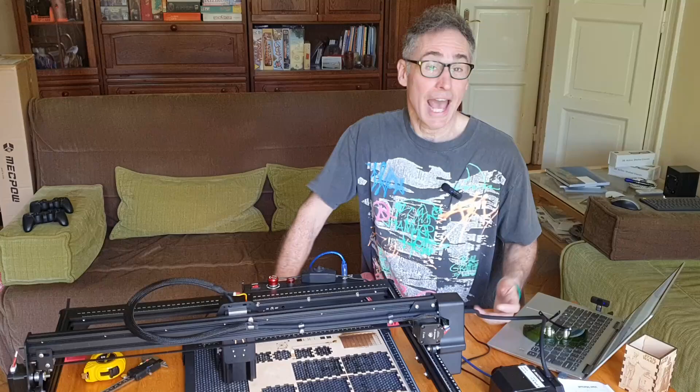Hi everyone! As many of you are still waiting for your Sovol SV08 3D printers to be delivered, I thought we could take a little break from the main theme of my channel and talk a bit about something different, but super exciting for our DIY projects: laser cutting. This Mecpow X5 in particular won't take weeks or months to deliver, as mine arrived basically overnight from geekbuying.com. I have just started exploring the vast possibilities, not so much as an alternative, but more as a complementary technology to 3D printing.

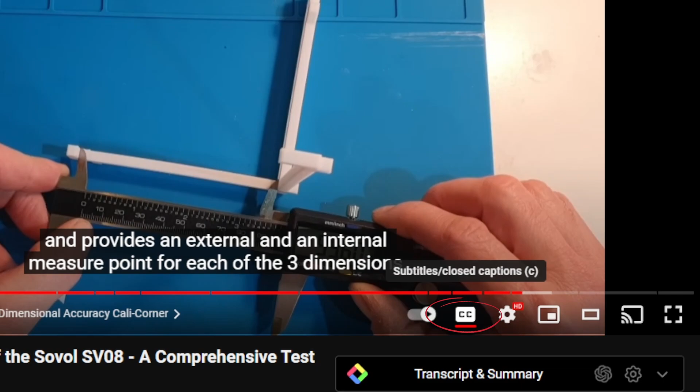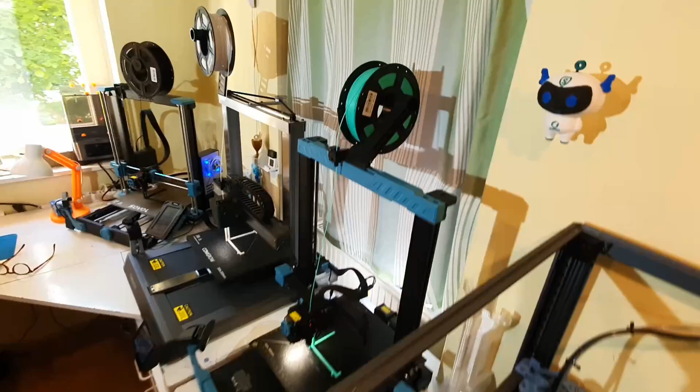You and I, we all enjoy exploring the world of 3D printing, many of us specifically with Sovol's budget-friendly yet feature-rich printers, from the Sovol SV06 Plus to the all-new SV08. But have you thought about looking into laser cutting and engraving? I think laser cutting, much like 3D printing, is another fantastic way to bring our creative ideas to life.

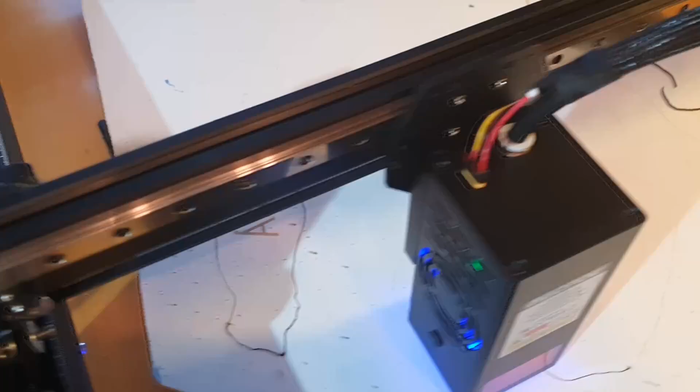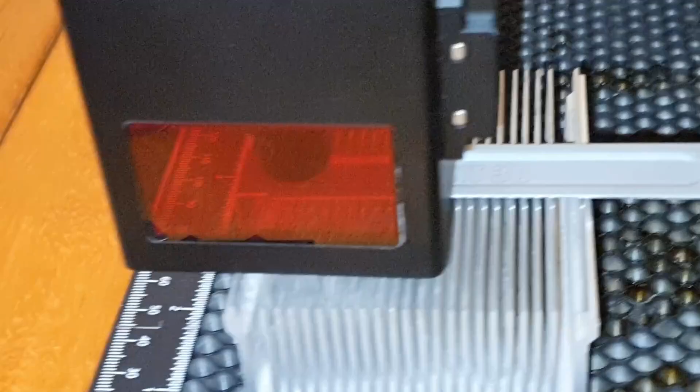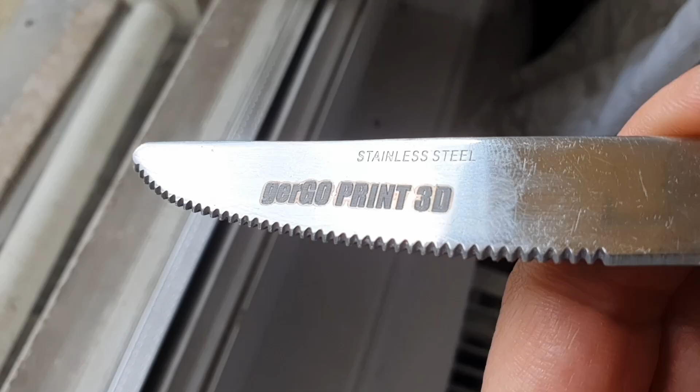Of course, instead of the additive process of printing layer by layer with plastic filament, here we are using a relatively powerful laser to cut or engrave materials like wood, leather, or even some metals. This opens up a whole new realm of possibilities. Imagine making large custom signs, intricate designs on wood, personalized leather items, or engravings on metal objects. All quite different from the colorful plastic we can 3D print. And we can even combine laser cut parts with our 3D printed projects.

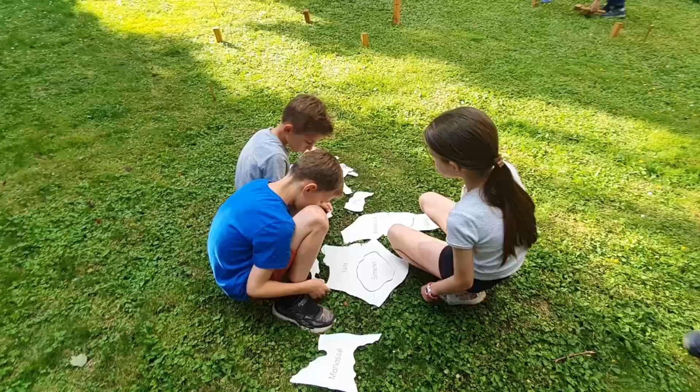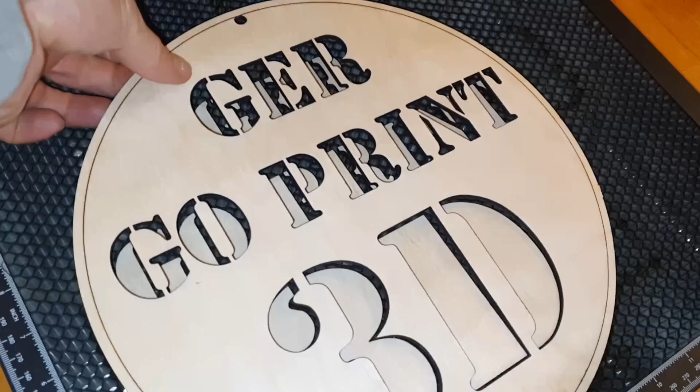What drew me into laser cutting was the ability to work with these more natural materials. There's something incredibly refreshing about crafting a beautiful wooden container or a detailed leather coaster. These materials can be sometimes much stronger and more durable than PLA or even PETG or ASA, not to mention the material cost of larger items, which can be surprisingly low compared to the filament requirements, which is great for anyone on a budget. So, laser engravers and cutters are not a replacement for 3D printing, but a practical alternative in some cases, like creating large signs much quicker than printing.

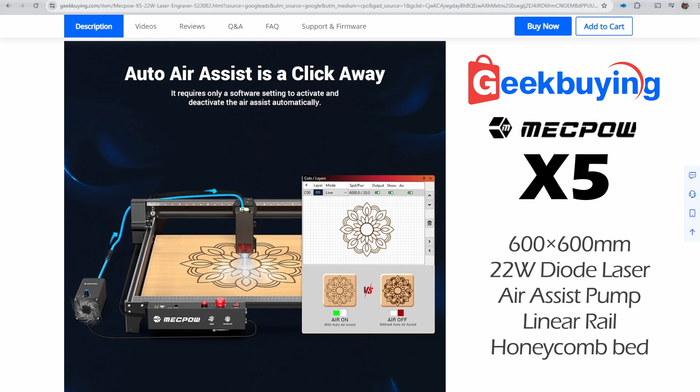Now, just like Sovol has been our go-to for 3D printers, geekbuying.com directed my attention to a similarly impressive option for laser cutters: this Mecpow X5. The X5 offers an exceptionally large 600 by 600 millimeter build area and a rich feature set, all at a fraction of the price of other brands. As I did my preliminary research on which device to get, the Mecpow X5 stood out for its versatility, as it provides most of the features you'd want, and even some more, all in one complete kit just under 500 euros. You'll see in a minute, this includes really everything from a relatively strong 22-watt laser module, an included air assist pump, and the linear rail system, to even the gift honeycomb bed that would otherwise be a separate purchase with other brands.

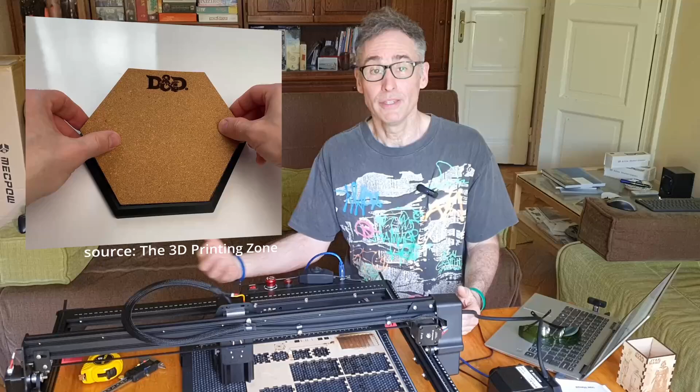I felt the same excitement as last year when I first heard about the value my first SV06 Plus or this latest SV08 offered. I think the Mecpow X5 can really complement our Sovol printers beautifully, for some projects providing alternative materials, for others combining multiple materials, for example 3D printing connections for laser cut wooden parts.

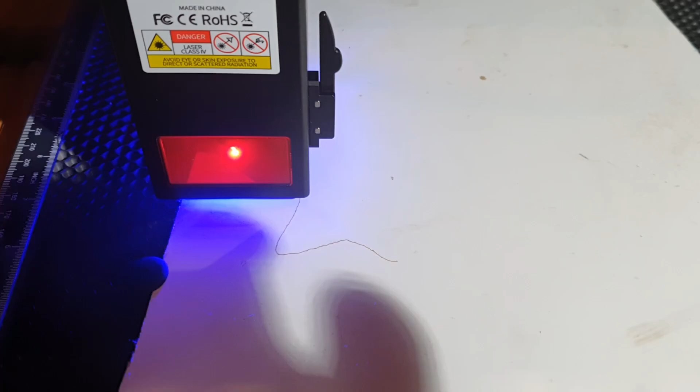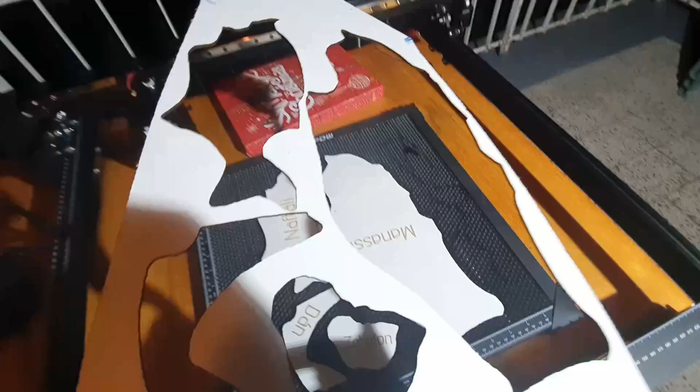Transitioning from 3D printing to laser cutting was smoother than I expected. Both involve working with digital designs and require a very similar mindset. However, laser cutting also brings its own challenges and rewards, making it a great next step for any 3D printing enthusiast looking to expand their skills. When it comes to hardware, this particular laser engraver uses a combination of linear rails and V-slot wheels, kind of like a mixture of the SV07 and the SV08 3D printers.

I hope I managed to pique your interest, as I will show you my initial experience with this large-scale laser engraver, from unboxing to assembly, initial software impressions, and a few exciting test projects, which are of course just the tip of the iceberg. I received 2 packages.

We will unpack this 440 by 440 honeycomb laser pad a bit later. The device comes disassembled in this 95 by 38 by 14 centimeter box that, according to the shipping company, weighed 6.5 kilograms. That's an A4 size sheet of 3mm plywood sample material on the very top of the package. Everything is securely packed in white laser cut foam, how fitting for a laser cutter.

A pretty short 70 centimeter A to B USB cable. The user manual in 6 languages. Safety eyeglasses. Standard EU power cable. And a 24 volt 6 amps power supply with sufficient overcapacity for the 1 amp 22 watt laser module would need. Some more sample materials, a small piece of MDF and perhaps aluminum.

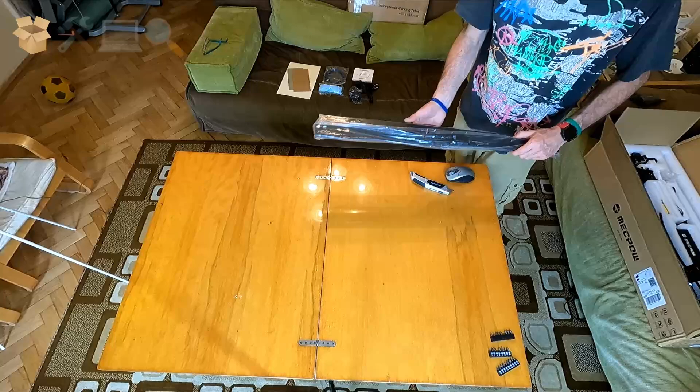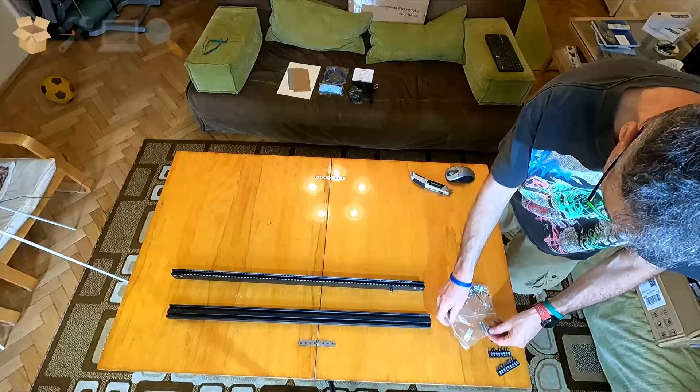2 of the longer 20 by 40 extrusions which make up the side of the frame along the y-axis. The screws come in 2 bags, and they've mindfully included 1 extra spare of everything. The shorter extrusions are for the sides along the x-axis, 4 sheet metal feet, which will raise the frame about 65 millimeters above the desk. And this is the laser toolhead itself.

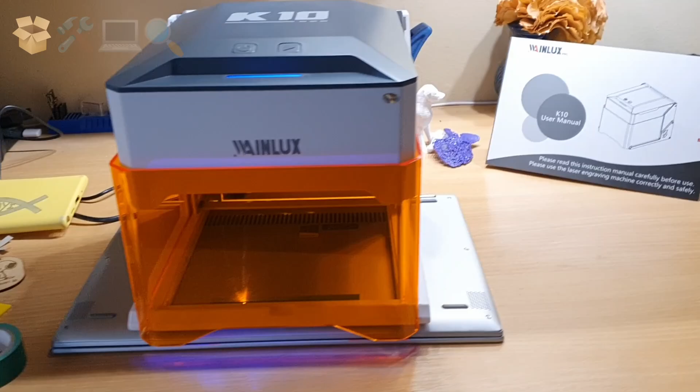The diode laser kit combines 4 5.5 watt modules for a total output power of 22 watts in the standard variant and 6 modules for 35 watts in the Pro version. I have the standard variant here, which is already a major step ahead of the 3 watt engraver I had a chance to test earlier in the year.

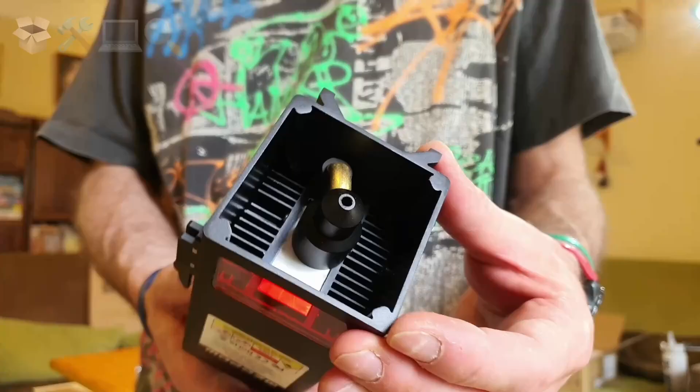It is behind a protectively stained plexi window, though the use of safety eyewear is still required. According to the listing on geekbuying.com, this module should be capable of both cutting and engraving tougher materials. We will soon see. On the top is the power and air assist tube connections. This focusing bar will help set the correct distance from the surface to the fixed focus optics.

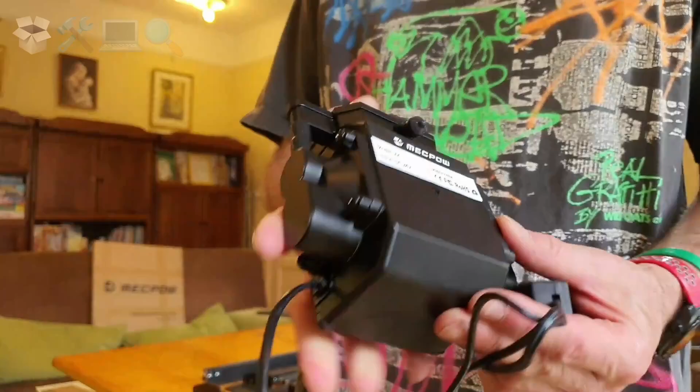The inclusion of the air assist pump in the base package is very welcome. It makes this an even better deal, in my opinion. This saves us both money and hassle looking to make sure we find the compatible pump. See, it will get electric power from the controller box, and it will connect to the gantry using this rubber tube. More on this whole thing later.

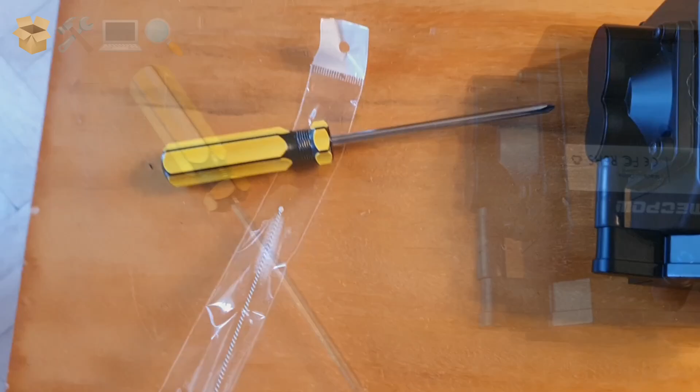We get some rubber feet, a full-size Phillips screwdriver, and a brush for cleaning the air assist nozzle over the lens or the honeycomb bed. The next parts are already assembled. The controller box is permanently connected to the gantry using a flexible wire loom in a low friction cable sleeve with reasonably good strain relief on both ends.

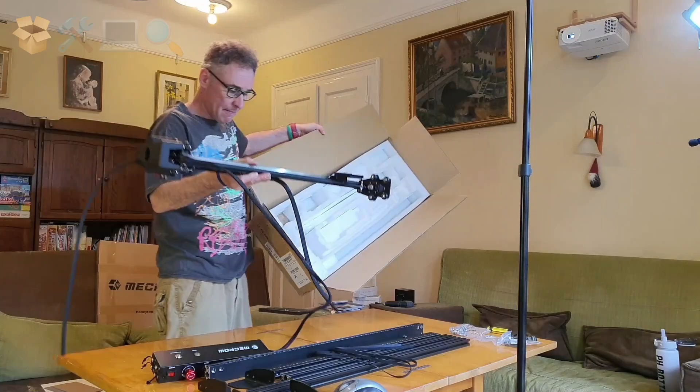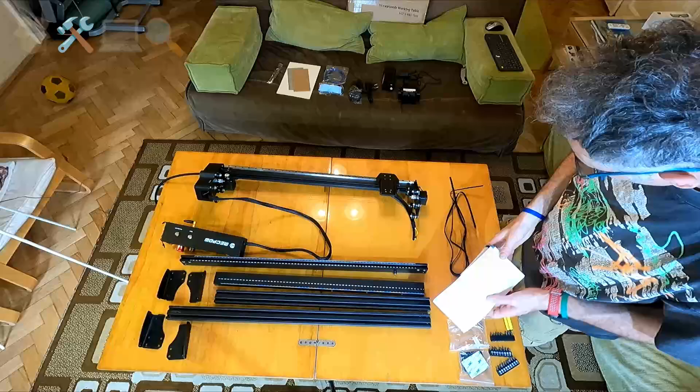The 6mm timing belts are part of the Y-axis motion system, and V-slot wheels for the Y motion with the same type of POM wheels that are going to be very familiar to us 3D printer owners, such as the Sovol SV07 and 7 Plus. We'll take a closer look at all these components in just a bit as we assemble everything, because with this we've concluded the unboxing. I will follow the steps in the user manual starting on page 7 for the assembly.

So, step 1, according to the booklet, is to connect the front X and Y axes, which was a bit tricky because of the tiny graphics in the booklet. Basically, we need the 2 longer extrusions and one of the shorter ones with the ruler marks on it. That goes in the front. The side extrusions go short side up, the left side showing the ruler, and the front X extrusion, also with its ruler marks, showing on the top.

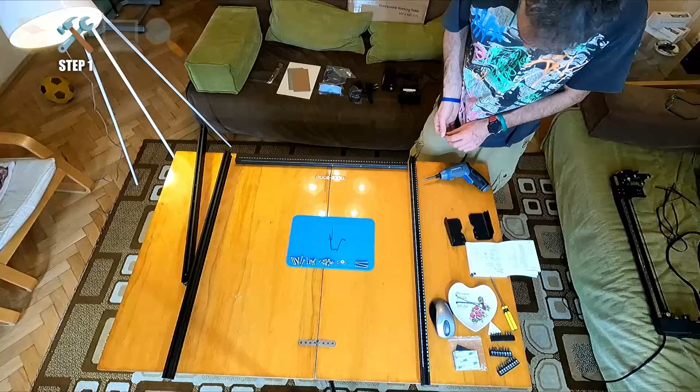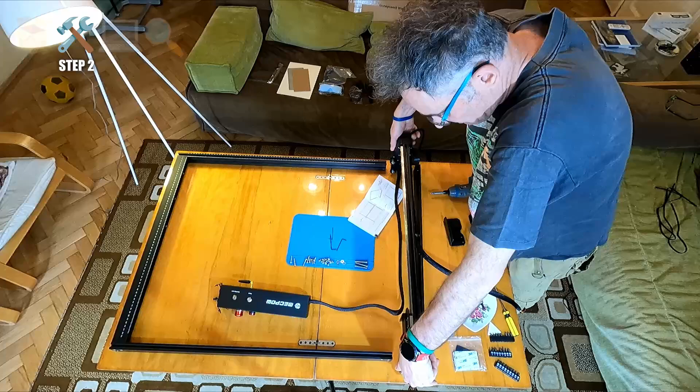Now it's best to sort the included screws by size. You will need the second longest ones, the M5x30s, to fasten these 3 extrusions together. So we use a pair of M5x30 screws on either side to secure them together. In step 2, before adding the other X extrusion in the back, they instruct us to slide in the gantry by rolling the V-slot wheels onto the Y-axis frame. The side with the cable goes on the left side where the ruler markings are.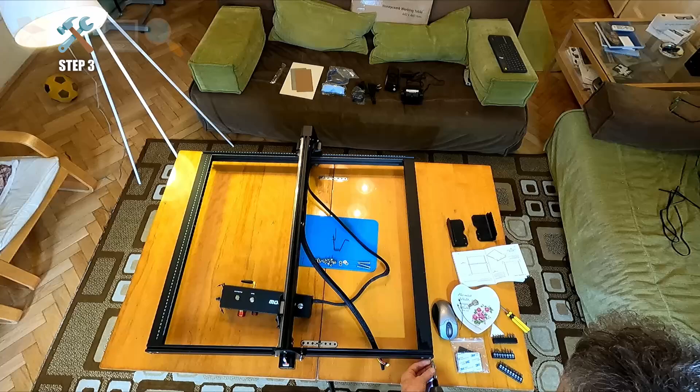Then, in step 3, we fasten the 4th piece of the frame, also flat side up, using the remaining 2 pairs of M5x30s. The included full-size screwdriver is pretty good, but an electric one is still recommended. In step 4, we add the 4 stands on the corners. There are 2 pairs. The official video has good close-up of their correct orientation. You will need to use 3 of the M5x8 screws for each corner. Those are the shortest of the screws. They have included 12 of them plus a spare.

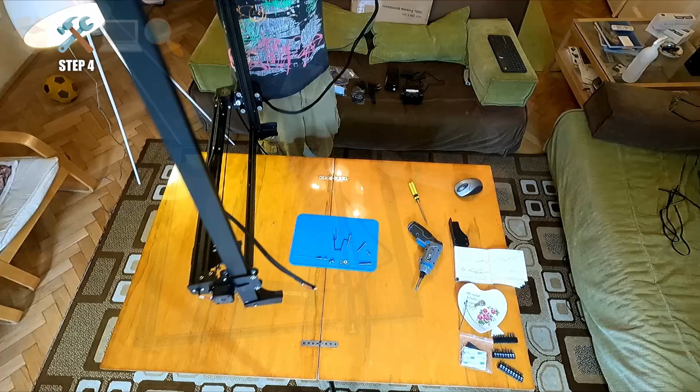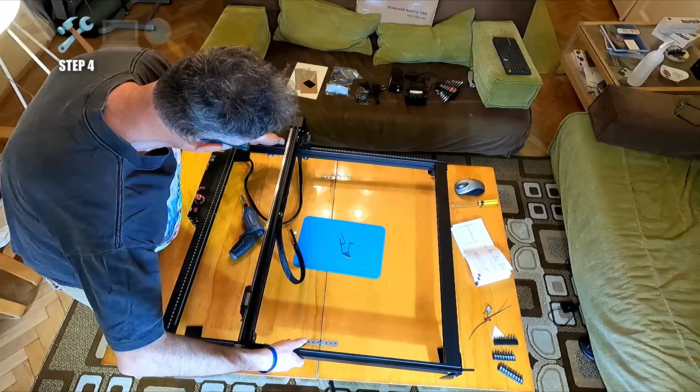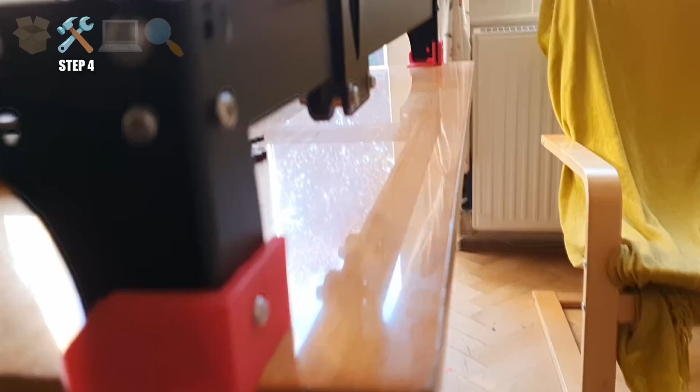Now I found these sheet metal stands very lacking. I don't see how the self-adhesive rubber feet that were included could or should be attached to these, but they are super slippery without, and they also scratch up my table. But here comes the benefit of having 3D printers around and some design skills. I quickly designed these little slippers for the stands, which not only stop them from scratching up my table, but also secure the laser cutter to the table so it doesn't move around.

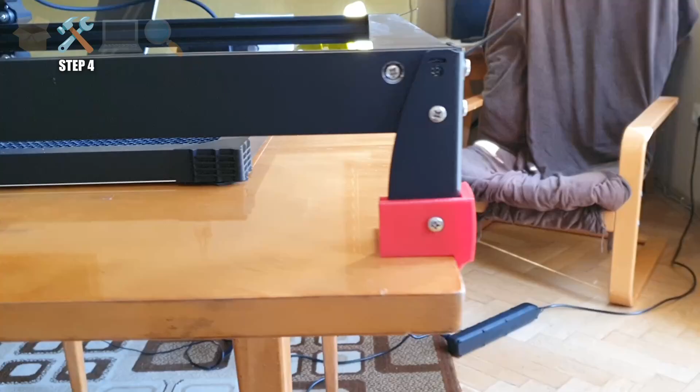I printed the prototypes out of PLA, but then used my super flexible red TPE for the final version. I published these STLs in my Cults 3D account, though they are quite specific to the size of my table, but maybe you can adjust the step versions to fit your needs. We are not there yet, however.

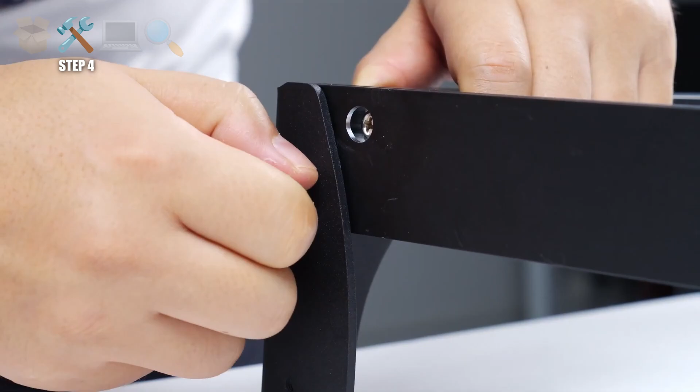We've just fastened the 4 stands in the corners of the frame. Each stand is held by 1 screw on the outside of the Y frames and 3 more screws on the side of the X frames, but you shouldn't fasten the top one on this side yet. You'll see why in a minute.

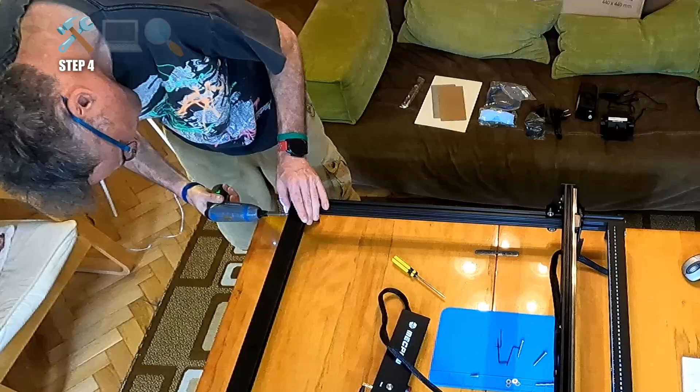There were some problems with these screw holes though. 2 of the screws did not go in, their threads were stripped. It would probably be easy to fix, but since they don't seem to be crucial, I just left these 2 screws out.

Step 5, according to the booklet, will have us install the timing belts for the Y motion. But I skipped ahead to step 6 instead and installed the controller box first. I think it makes more sense in this order. It's held by the 3 longest M5x40 screws.

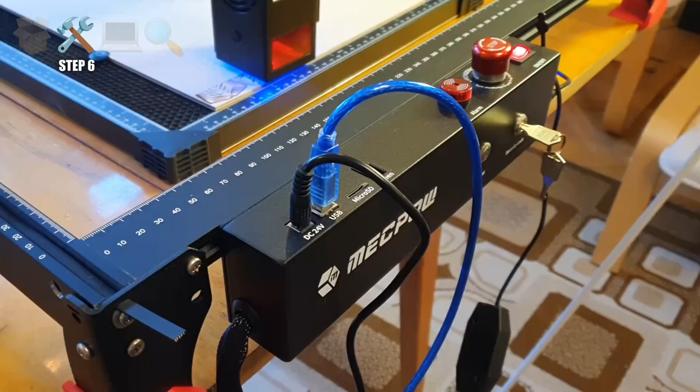Let me take the opportunity to give you a little tour of this control box. From left to right on the top, we have the power, USB, micro SD card slot, and an RJ45 style screen connection, alarm light, emergency stop button that you rotate to unlock, and

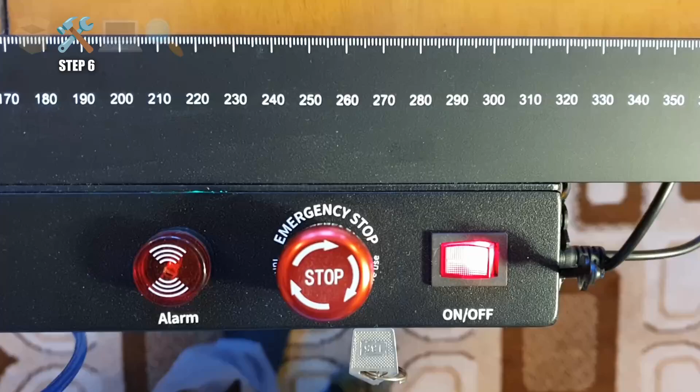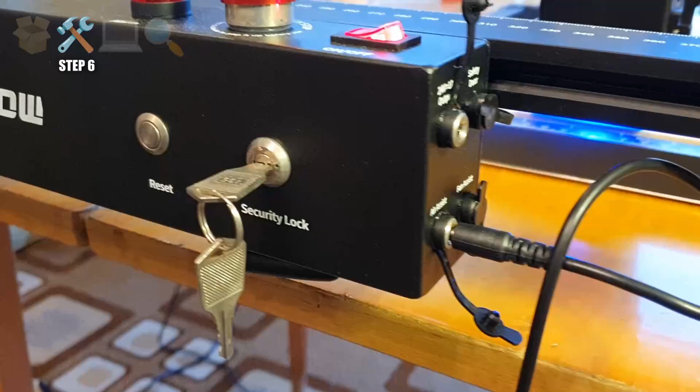the power switch. On the side, 4 extension ports with constant 24 volt output for LED and exhaust fan, power for air assist pump controlled via M8 and M9 commands, and the safety door sensor. On the front, we have the child security lock with keys and a reset button.

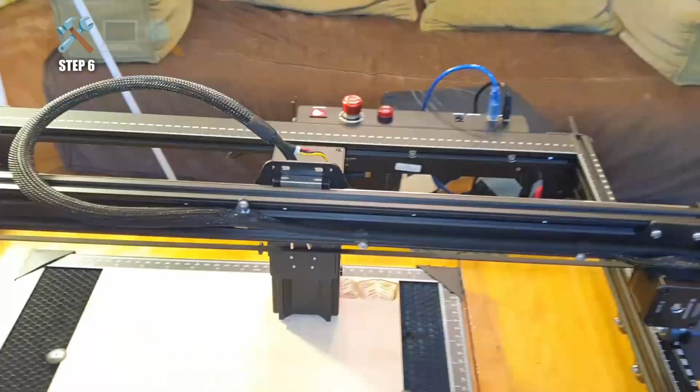On the inside, the sensor and switch for the flame detector, which turned out to be unreliable, so I keep it off to avoid ruining jobs. Finally, the Wi-Fi antenna at the bottom is for mobile connection. We will revisit it a bit later.

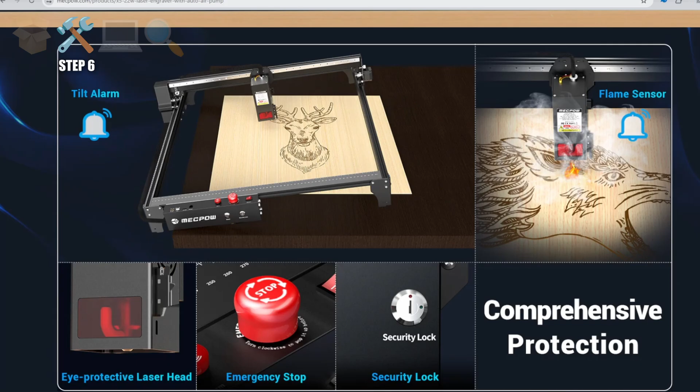The website mentions a tilt alarm, but I wasn't able to trip it, no matter how I tilted the device. Everyone in the room should wear safety glasses when the device is active. With the controller box in place, let's advance to step 5, installing the Y-axis belts.

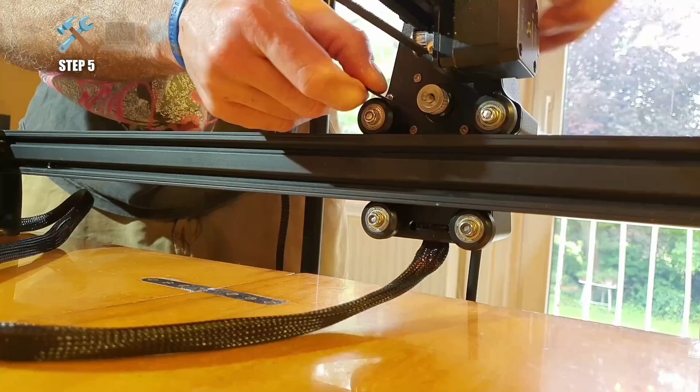Thread them between the top POM wheels and the pulley, with their teeth facing the pulley. The belt runs in the V-slot, teeth facing down, and through the holes at the end of the extrusions. Make sure the moving gantry is perfectly parallel to the front and back of the frame, and pull the belt's

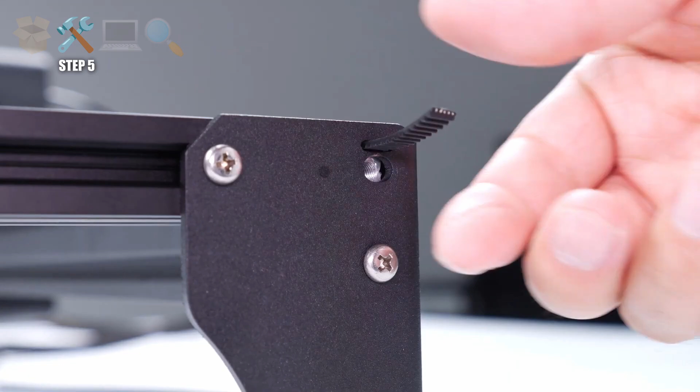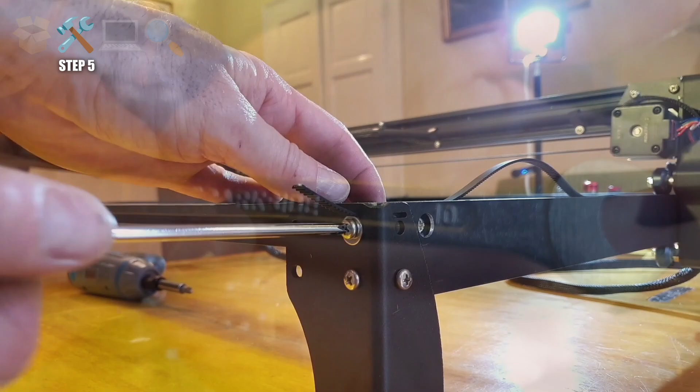ends through the holes. We are using the third M5x8 screws with washers to fix the ends of the belts. Do not cut the ends, so you can adjust the belt tensions later. My 3D printing background caught up with me once again, and I also checked the POM wheel tightness. They felt a bit loose.

The carriage had too much of a wobble, so I adjusted the eccentric nuts on the bottom wheels to bring the wheels closer to the V-slots. They are the correct distance if you can still rotate them, but with a little bit of force.

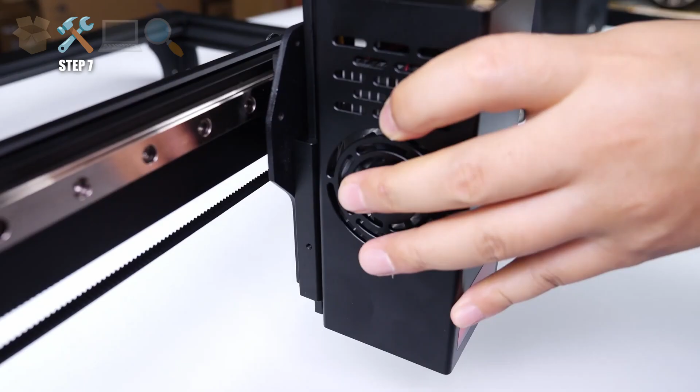Having step 6 already taken care of, in step 7, we next install the laser module. This is super easy. Just slide it in its carriage from the top and fasten the 2 knobs holding it. Then we can connect the electrical cable and the air pump tube on its top. Push down on the locking ring when inserting the tube.

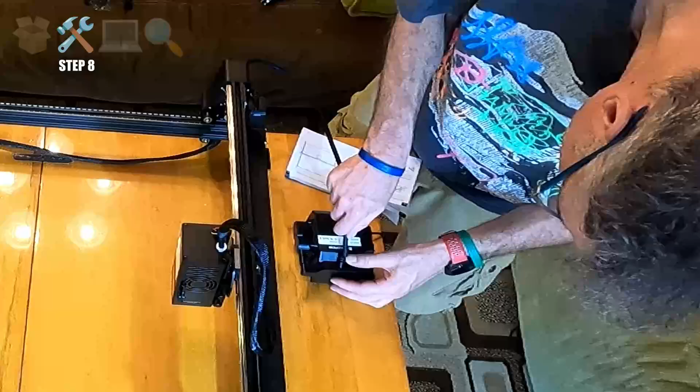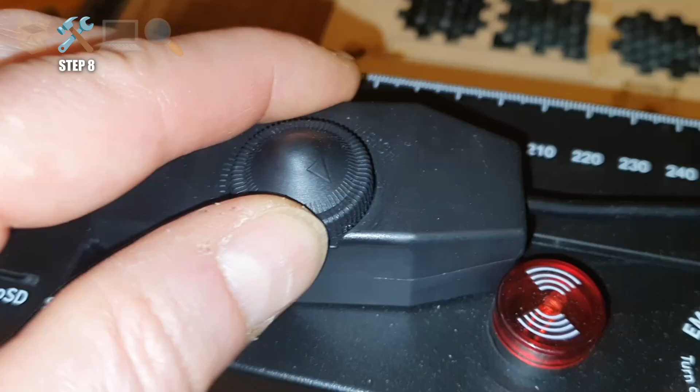In step 8, the air pump should be placed on the left side of the device. Mine had a plug in its air outlet, which I had to remove before connecting the rubber air tube leading to the tool head. The electric cable plugs go into the port marked Air Assist on the control box. According to the official website, this pump can provide a maximum airflow of 30 liters per minute, but its power cable also provides speed control with an off position.

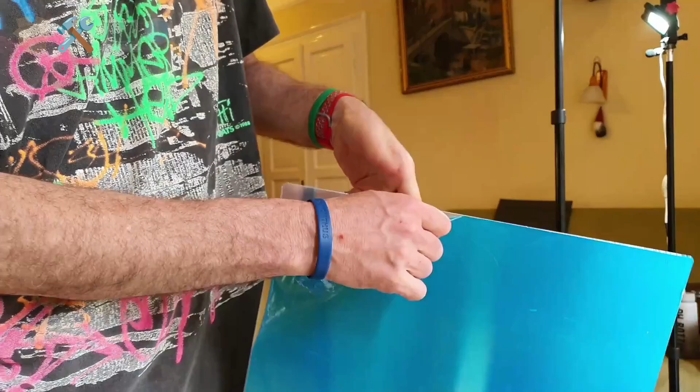Time to unpack our honeycomb bed. I received the 440 by 440 variant. The 650 version would match the work area better. Be sure to remove the protective film from the aluminum desk protector.

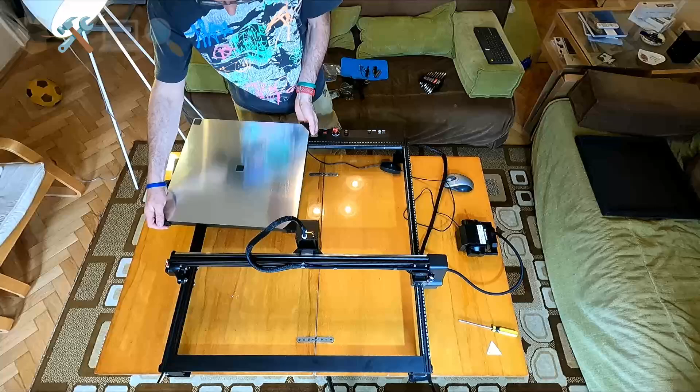I used the corner caps to secure this bottom tray to the frame of the bed. A set of adhesive rubber feet was included in the package. I stuck 4 of them on the corner caps and 1 in the center to stop the honeycomb bed from sliding around on the table.

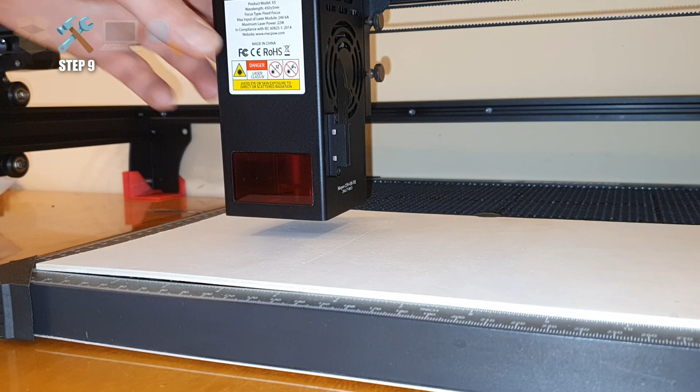While I was filming the assembly process, a package of 4mm plywood sheets was delivered, which I'll use for my initial projects. As outlined in step 9 in the booklet, I set the focus distance to the work object using the little lever or focusing bar on the side of the laser module. This Z-axis adjustment for focusing provides a range of about 130 millimeters relative to the height of the gantry.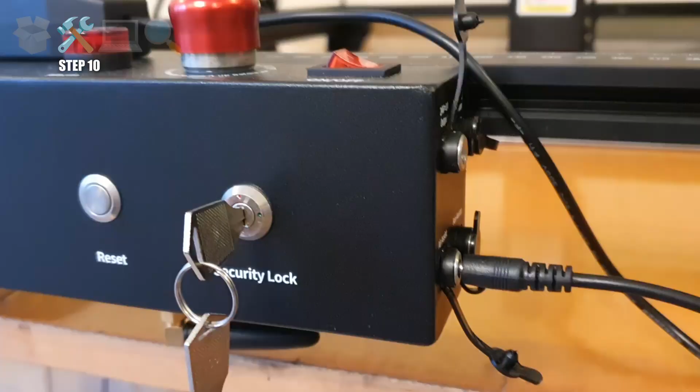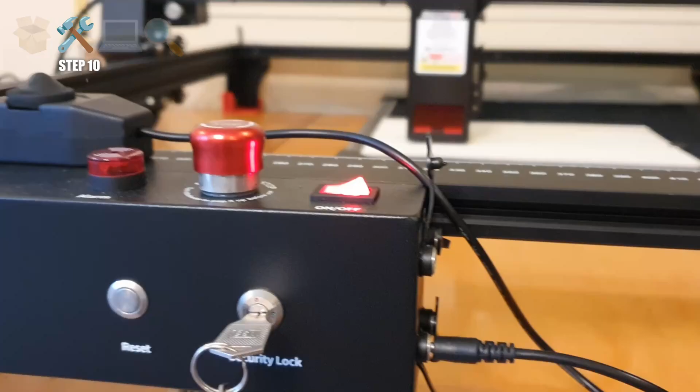Make sure the security lock is unlocked and the emergency button is released before turning the device on. Yes, the tool head cooling fan is pretty loud. You won't want to keep this thing on when it's not working.

I installed the free LaserGRBL software on my computer, and it connected without a hitch after plugging in the included USB cable. If it doesn't, double check the emergency button, and on older computers, you might need to manually install the USB driver. LaserGRBL has a dedicated menu command to help you with this. After homing, I was happy to see all motors and limit switches worked correctly.

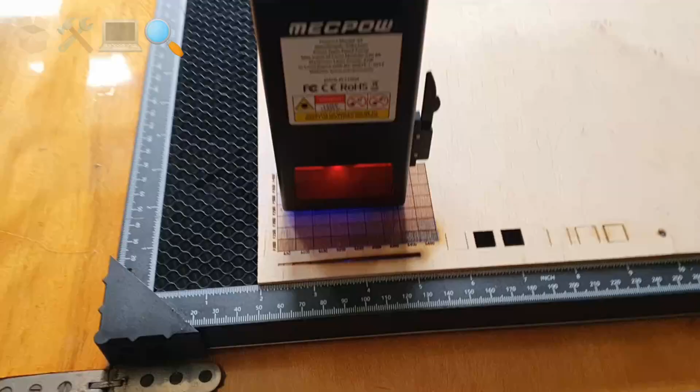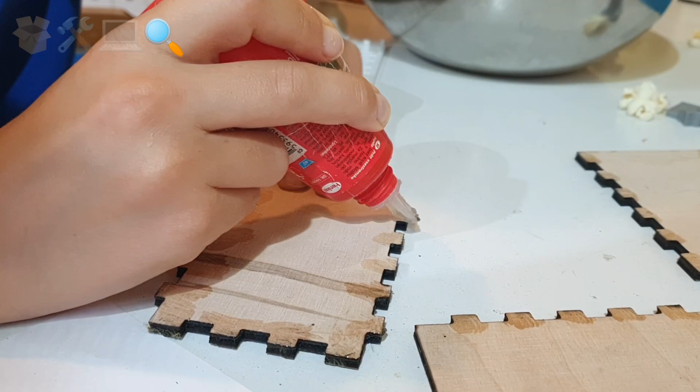I did a quick engraving test and a few cutting tests to come up with the correct values for speed and power. With my little cousin, you know from my 3D printing videos, we decorated and cut a pair of pencil holder boxes using boxes.py.

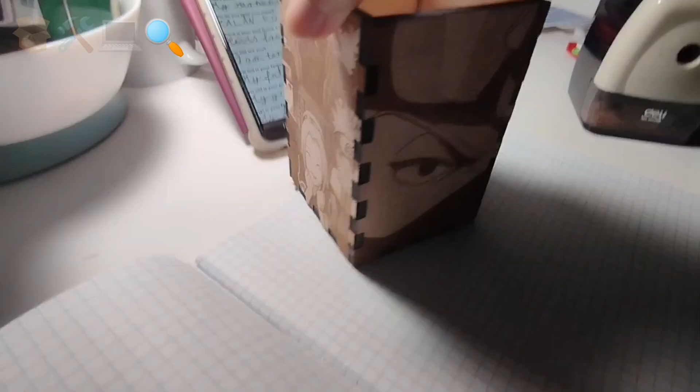I think both our Star Wars and the Naruto designs turned out exceptionally well, especially for a first project. I will talk about these and more in a next video. I also cut a large map puzzle out of this 3mm thick plywood sheet. It was super smelly, brutal. Until I find a good enclosure solution, I will only operate this laser cutter on my porch.

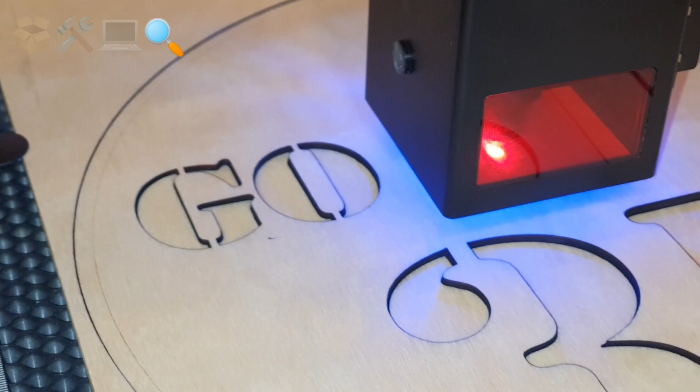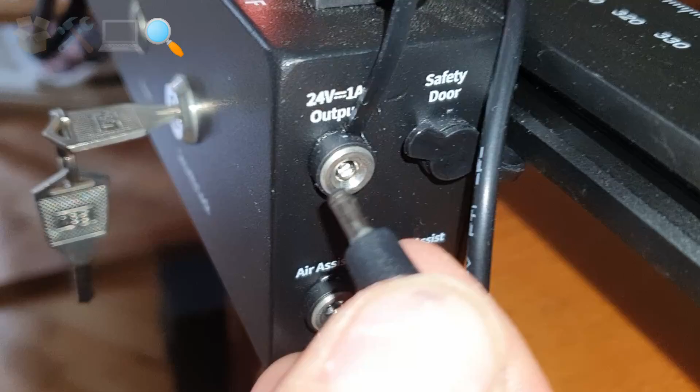Air Assist really makes cutting cleaner. If plugged into the designated Air Assist connector, Air Assist can be software controlled via the M7 on and M9 off commands. But if we plug the Air Assist pump into the identical looking 24 volt LED light header, which provides a constant 24 volts, we can manually control the pump using the switch on its cable.

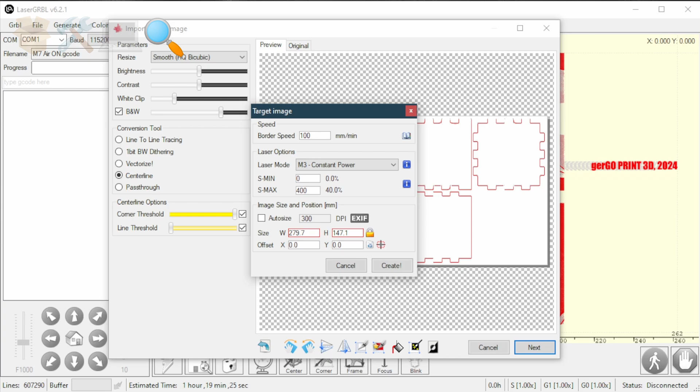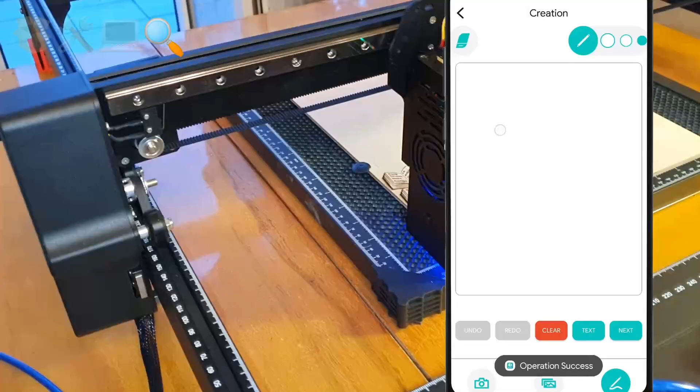Eventually, I found a way to engrave and cut in a single project using LaserGRBL, also switching Air Assist on or off as necessary between the passes. I will talk about this and my initial experience with LightBurn in a future dedicated video. Finally, I tested the Wi-Fi capabilities of the Mecpow X5 and the recommended Android app. Well, I'm not blown away by either. For now, I will just stick with wired connectivity and my PC.

What do I think of the Mecpow X5? This being my very first full-size high-power laser cutter engraver, I can only give my first impressions, which are very positive. I love the lightning fast delivery and very budget-friendly price from geekbuying.com.

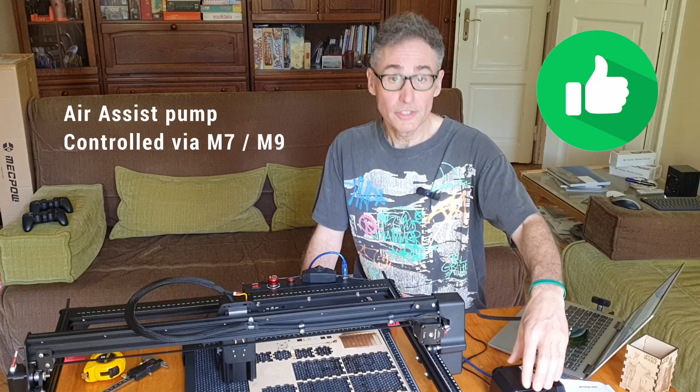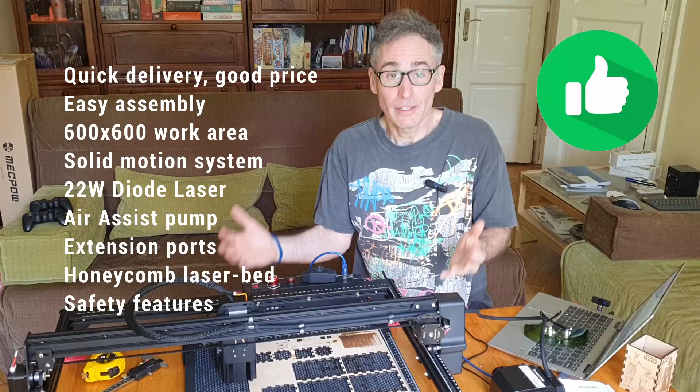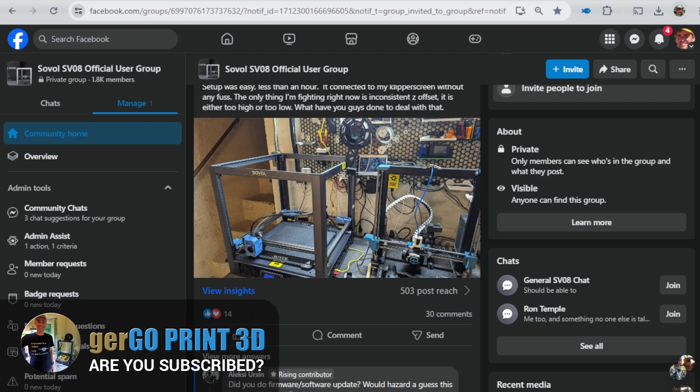After this quick visit to lasers, I already have my next 3D printing video in preparation about the Sovol SV08. We've utilized the large print volume for a special race car part. I will talk about all the considerations and the experience gathered in this project. I'm happy to hear some of you are already starting to receive your SV08s. We will tune Orca Slicer to work perfectly with this fantastic 3D printer.